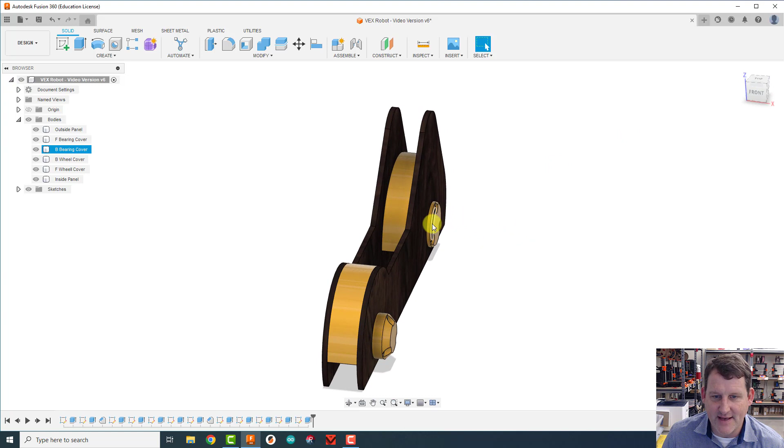All right, so in Fusion, we've got our robot here. I'm going to rotate around so we can see the other side. I want to take this exact bearing cover and just put it on this side as well. Now I could go through and remake the bearing cover just like I made this one and it would work out perfectly. But what I want to do is do something fast and easy.

I'm going to do what's called a mirror. So when you look in the mirror, you see yourself looking back at you from a little distance away. So what we're going to do is we're going to create a mirroring plane, we're going to create the surface of the mirror, if you will. To do that, we're going to use a construction plane, and we're going to use what's called a midplane.

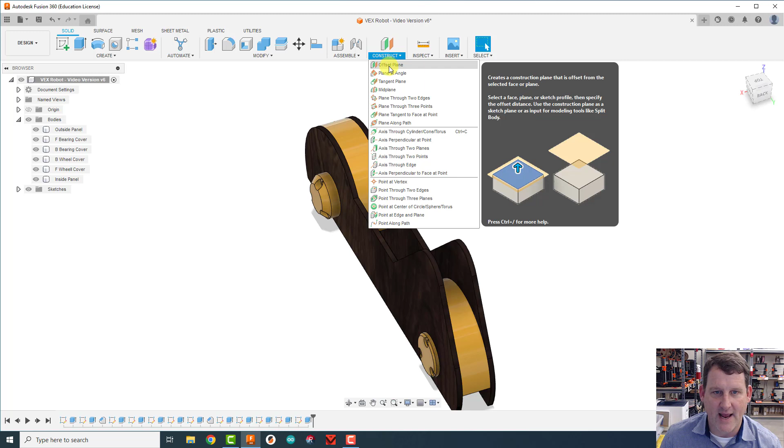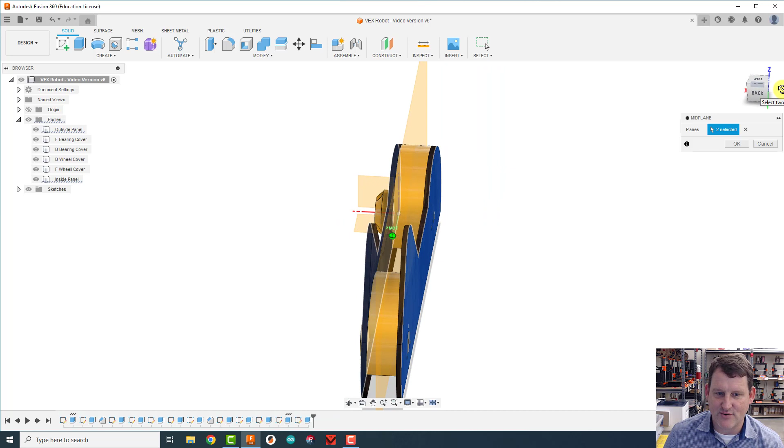What this does is it creates a surface, a plane, halfway between whatever two objects you click on. So in this case, I want to be halfway between this face, the outside panel face, and the face of the inside panel. Notice what it's done. It's actually created this orange plane right down the middle here. This is going to be our mirror that's going to make this flip over there.

So once I do that, I'm going to click OK. And now I've got this huge plane cutting my model. You can see how it cuts it right in half.

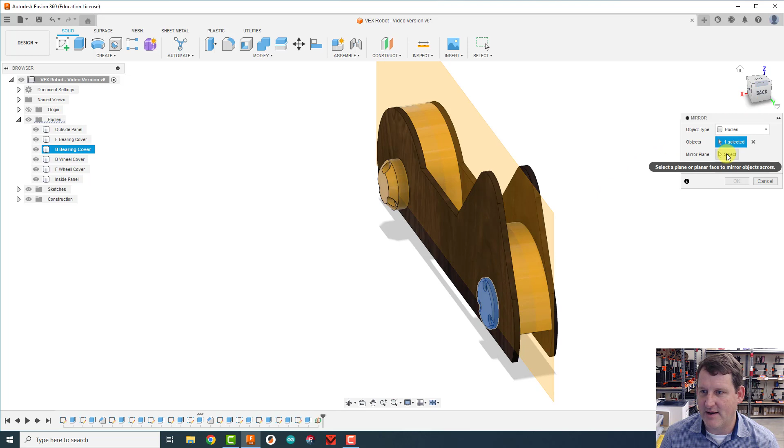Okay, now I'm going to come over to the Create menu and come down to where it says Mirror. I'm going to click on this, make sure this says Bodies. If it says something else, change it to Bodies, because I want to mirror the whole body. I'm going to click on this outside bearing cover. And then I'm going to tell it the mirror plane is this big orange thing we just made.

And now if I flip it to the other side, notice how it's showing me what it's going to make. It's going to create this shape from the outside here and mirror it to there. That's fantastic. And we're going to click OK. And now all of a sudden I have made that inside bearing in just a few seconds.

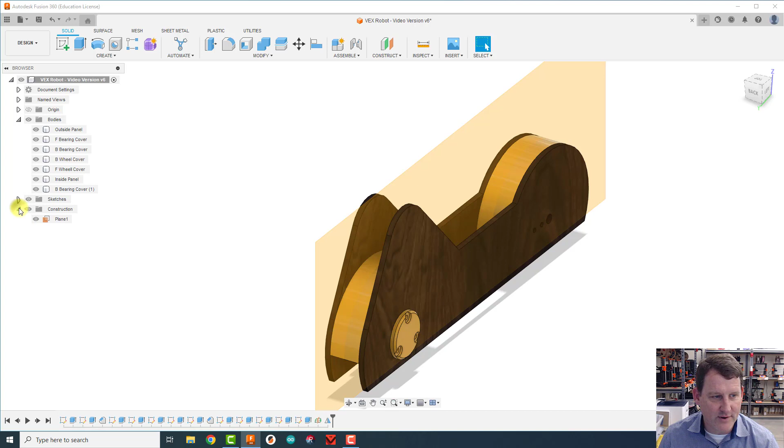So next thing I want to do is I'm just going to come here, open up my construction folder, and I can turn this plane off, otherwise it's going to be in the way all the time. And all of a sudden, bam, I've got that one. Notice how I have bearing cover, or back bearing cover 1. That's this one that it created. It named it 1 because this one was already called back bearing cover.

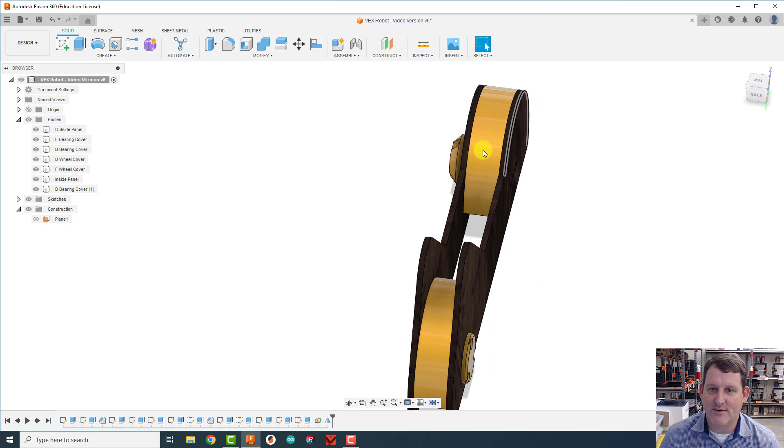Yay, we're ready. All right, now we need to take all of the parts we've made so far and we're going to mirror them to the other side of the robot. So I'm going to hit the home button real quick and we're going to mirror them all over here to this side. Now at this point, it's important to go the right way.

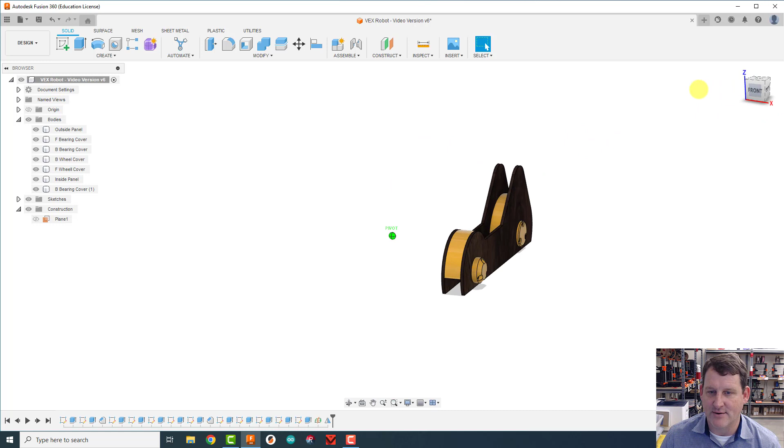The outside panel has a front bearing and a back bearing cover. The inside panel has just a bearing cover. So make sure you're looking at the outside panel right now. All right, the next step is to create that mirroring plane. To do that, we need to know how wide the overall robot is.

Okay, so the width of the robot, across this whole distance here, is 250 millimeters. We want the mirror plane to be right down the middle of it.

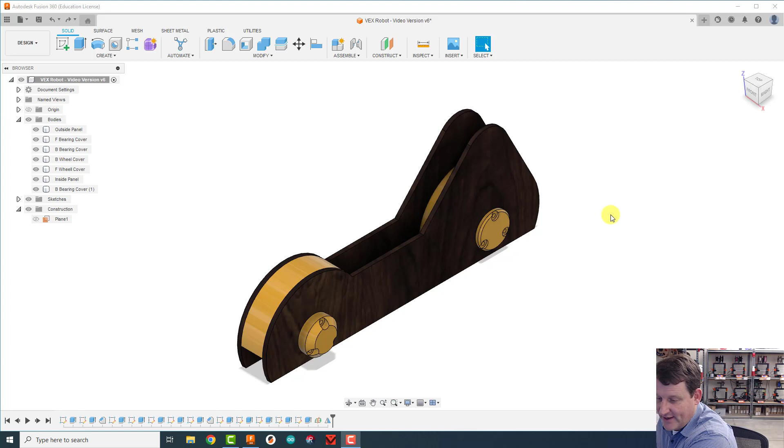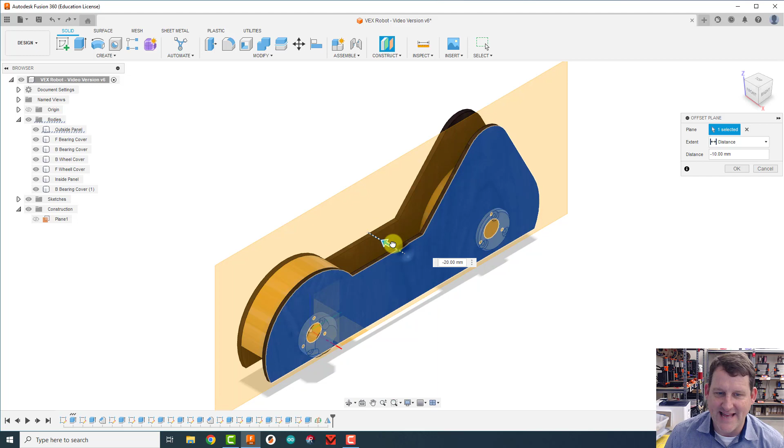Halfway between 250 is 125 millimeters. Now to make a plane 125 millimeters from this side, which is the halfway point, we need to create what's called, in the construction here, an offset plane. We're going to click on the outside face here, not one of these orange things, but this outside face of the panel. Then we want to move it to the inside this way, so make sure you're putting the plane on the inside panel side. For me that's going to be a negative number, and I want it to be negative 125 - that's halfway to 250 - and hit enter.

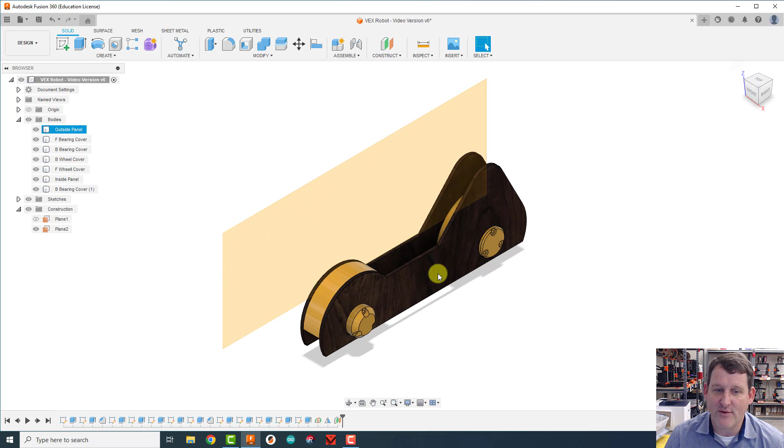Now watch how cool this is. All the work we've done to build all these parts, we're going to do all that work over again in just a few seconds. So I'm going to come here again to create and mirror. I can go through and try to click on all the parts, or I can just come to my bodies folder and click on all the bodies I've made so far, one at a time.

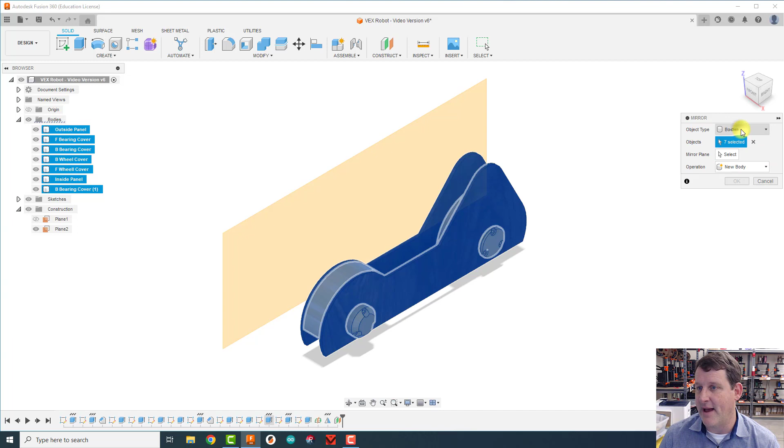That's all 7 of my bodies. Make sure object type says body - if it says something else, you've got to switch it back over to body, so make sure that's true. I'm going to select my mirror plane, click on this big plane I just made, and you can see what it's doing - it's going to create this gray part over here by mirroring all those pieces, and it's going to do it instantaneously.

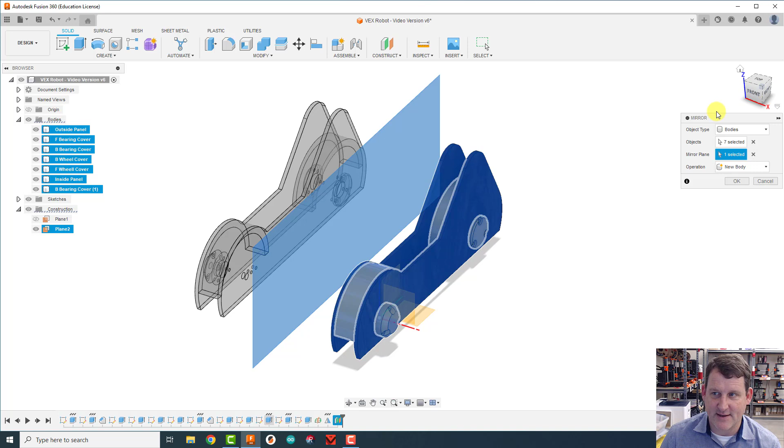Oops, except I've just noticed something. Let's hit cancel here, I forgot to do something. So I'm going to come back, turn my plane off here in my construction folder. Sorry about this - we never cut the screw holes in the wood and the panels. We need to cut screw holes so we can connect these two panels together.

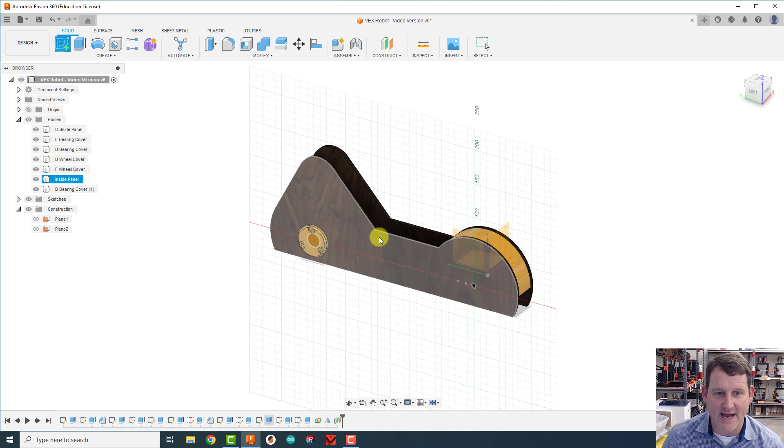So I'm going to create a sketch on this surface here, on the plywood surface. This is the inside plane - make sure you don't see a bearing cover, you should see the 3 holes right now. What I'm going to do is just punch holes through. So I need to know where the wheel cover is so I know where to put the holes.

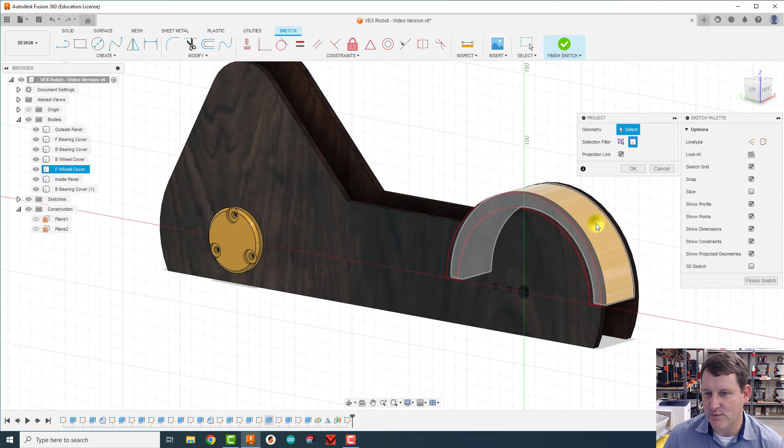So what I'm going to do is use P for project. I'll make sure it's set to the body section here, and then click on this wheel cover - notice it's drawing lines where the wheel is. I'll come over here and click on this back wheel cover as well, then click OK. Now when I switch back over to the left view by clicking on left up here, it'll square me up, and I can see I've got those circles on there.

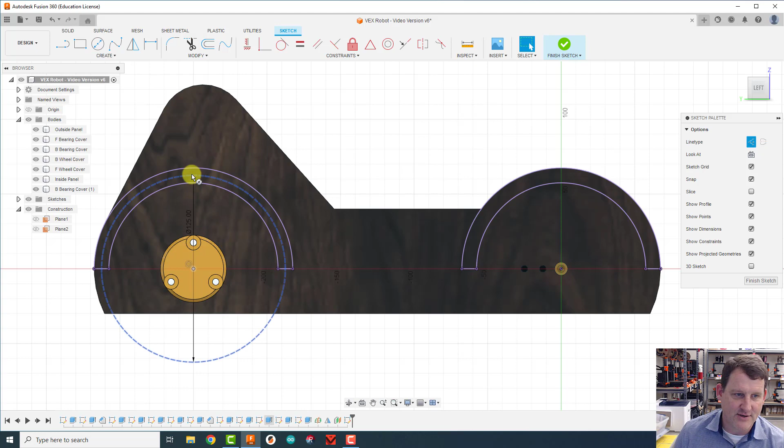I'm going to add another circle, but this time a construction circle. I'll click in the middle here and drag it up to about the middle between the two - that's supposed to be 125 - and hit enter. I'm going to do the same thing on the other one: grab a circle, still a nice construction circle, find the center right here, there we are, and type in 125, enter. My holes are going to be on that.

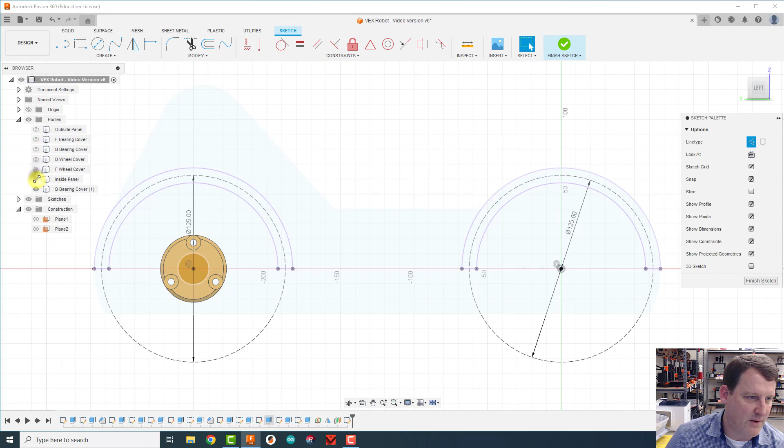So I'm going to actually hide all these other pieces so I'm not confused by what's going on. I need to cut 3 holes - one at the top here, another one here, and another one here. Same thing on that one. So I'm going to grab my circle tool, come up to the top - I know I'm on this construction line circle when I get an X like that - and go right up here, it's going to snap into the top, click, drag it out. Oh, I still have a construction line.

So I want to turn my construction line off because I'm going to use this to create a hole with. And I'm going to just type in 4.5 and enter. I'm going to do the same thing, but I'm going to do it down here, about like there-ish, and then do 4.5, enter. And then I'm going to use the C key to create a circle. So instead of clicking it in the menu, you can just hit the letter C on the keyboard.

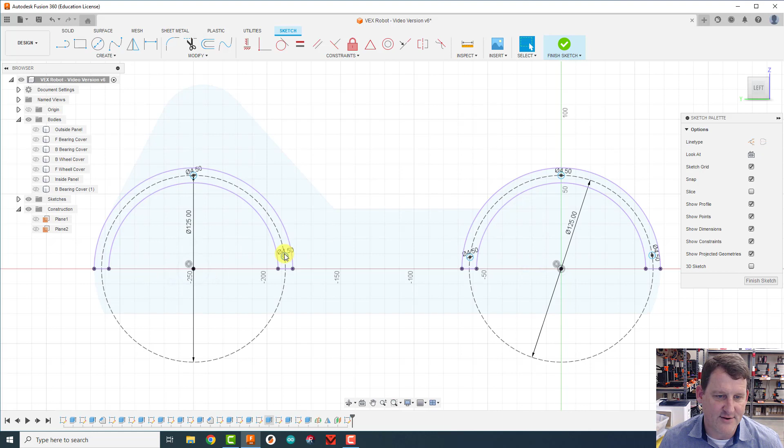Come over here and do 4.5. Doesn't really matter where, just down here somewhere. We'll line them up later. C again, come to the top here and do 4.5. And then C again, somewhere down over here, and then 4.5. Again, on that construction circle. C, click on the construction circle, 4.5, enter.

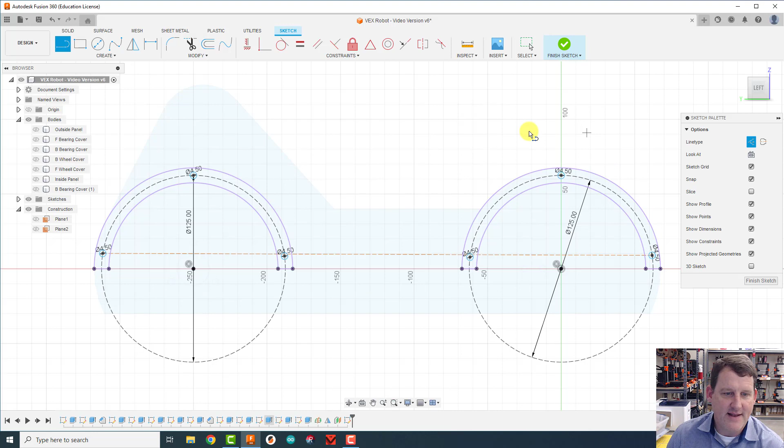Now we're going to take a construction line. So I'm going to turn my construction line on. I'm going to connect this first circle all the way over to the last circle, the center of it, right there. Now what I want to do is I'm going to make this line horizontal. So I'm going to use the horizontal constraint up here and then click on that construction line. That'll make it perfectly flat and level across.

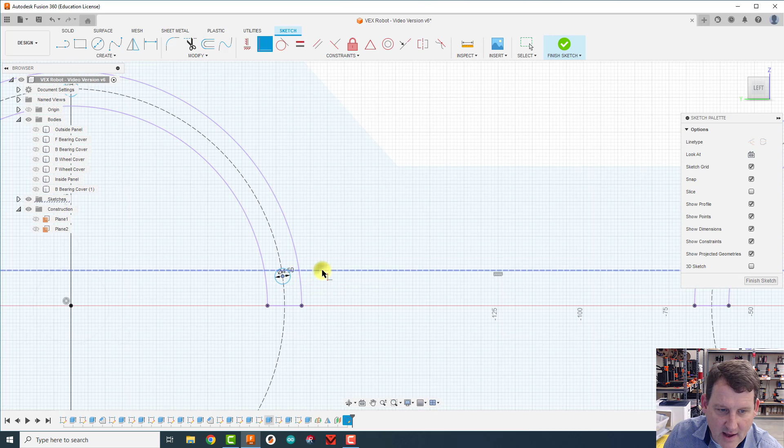And then I'm going to use my coincident tool, zoom in here. I'm going to click on the center of the circle and then click on the line, and it'll line that one up with the line. And then the center of the circle here, the little circle, and with that line there. Now they're all lined up.

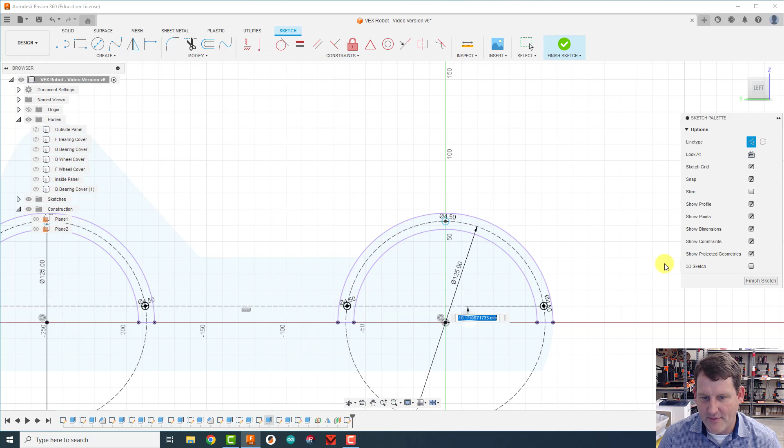Last thing I'm going to do is do D for dimensioning. And I want this line to this circle, center of this circle. I want that to be 10 millimeters. So type in 10, hit enter. Everything is locked in place now.

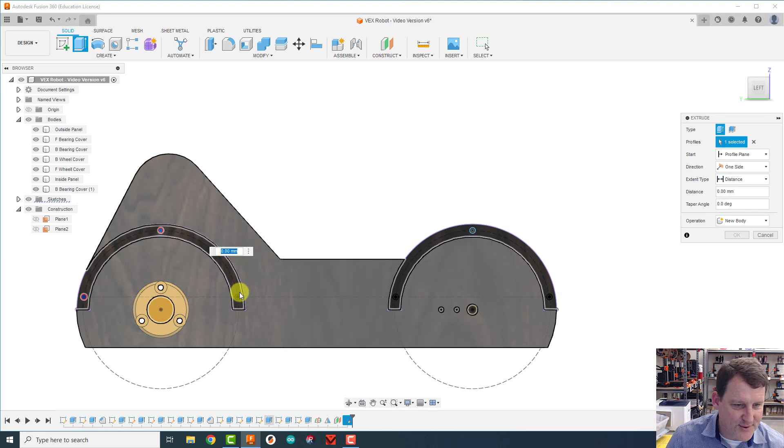All right, last thing I need to do is I need to extrude all 6 of these holes. So I'm going to turn everything back on. Make sure everything is turned on. That way everything gets cut as you do this. So I'm going to hit E for extrude. I'm going to click on that little circle, this little circle, that one, and these 3 as well.

Make sure you're clicking slow so you don't misclick. If you do misclick something, you can just click it again usually to get it off. If it doesn't work, you have to hit cancel and redo the extrusion. All right, now I'm gonna tip it so I can see what's going on. And I can see here's my arrow to pull.

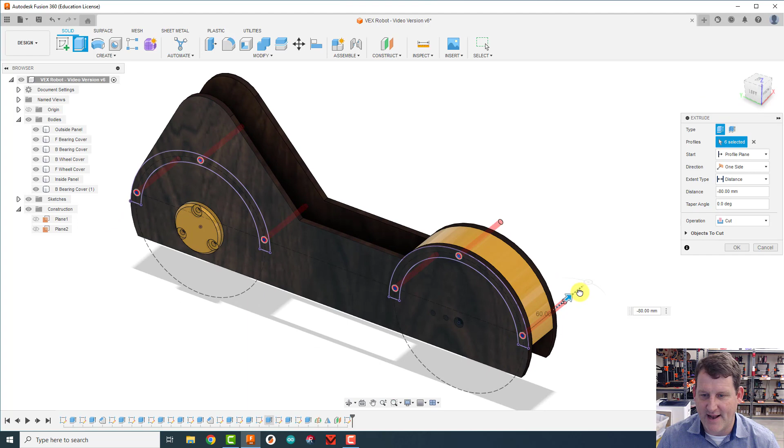I'm gonna pull it out the back side, and instead of letting it go way over extruded like that, I'm gonna do distance here and change it to all the way through, and then click OK. And now if I tip it back to that side view, you can see we have holes that go all the way through our part.

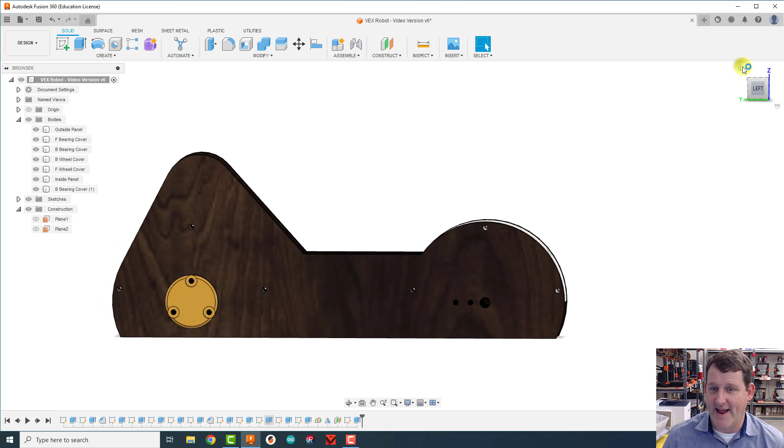All right, we're doing great. Hang in there. Now we have the parts totally done. Sorry about that. We have the holes in place now on both back and front. Now we need to mirror them. So I'm going to come back to my construction folder, turn on plane 2, tip it over a little bit, and now I'm going to come back and do that over again.

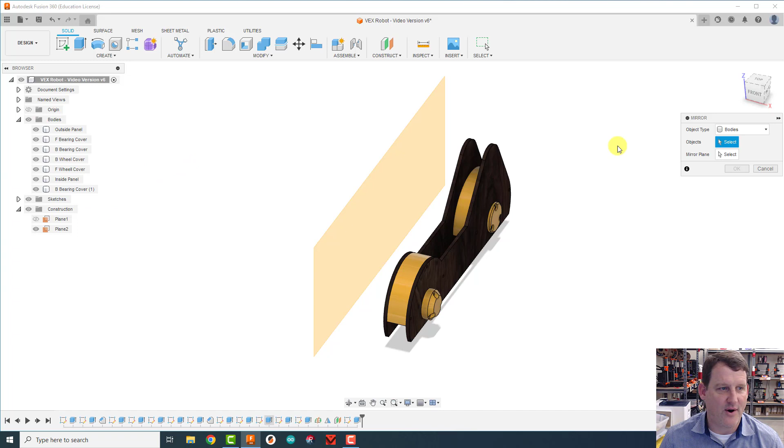I'm going to do a create, mirror. I'm going to choose, make sure this says bodies right up here. If not, choose bodies. I'm going to choose all of these bodies that we've made so far. Now I'm going to come over here and say select mirror plane. This is my midpoint, my mirror plane. And then you can see what it's making. It's just so cool that it does this also really fast.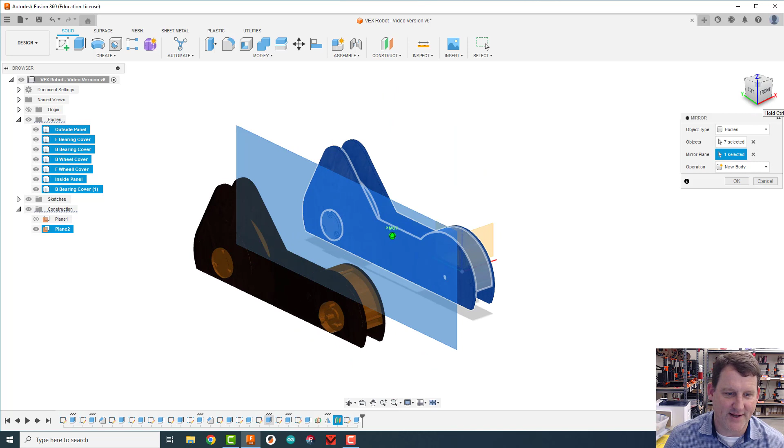And then click OK. And you can see right away we've just made those other 7 bodies. And now we've got 14 bodies in our bodies folder. I'm going to come back here, turn off plane 2, hit the home view, and bam, we're doing so great. This was a long video.

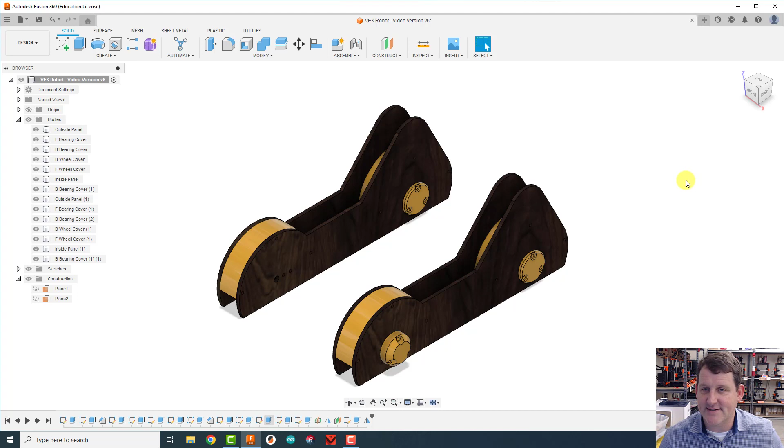Sorry it got so long on us, but everything is fantastic. Keep it up. You're doing wonderful work.